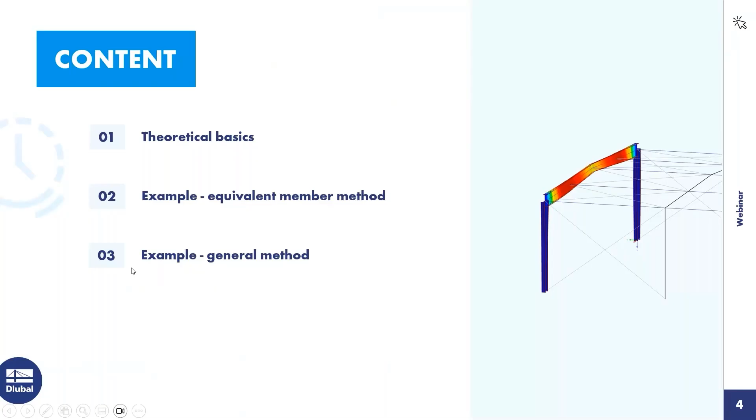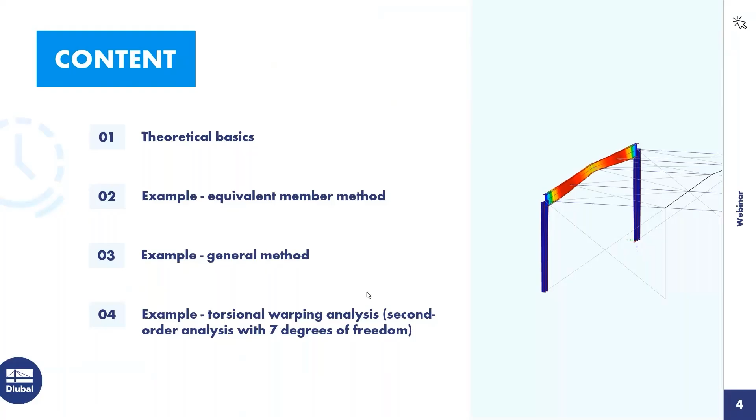For today's agenda, the first point is theoretical basics. It's only a small chapter in this webinar, as it should be more of a practical webinar. I've got only 3 slides. Then I start with the first example using the equivalent member method, then the general method, and in the third example, the torsional warping analysis, the second order analysis with 7 degrees of freedom.

Let's start with this overview table where the stability analysis methods are compared. You can see the limits of the different methods in the table. We'll go through this table line by line.

First line: equivalent member design according to 6.3.1 of Eurocode 3. This is for uniform members in compression. I sections, hollow sections, and other sections are valid, but only for compression. Then the different designs - flexural buckling, torsional buckling, and lateral torsional buckling - are done. Examples for these methods would be hinged columns or compression members.

Then the second line, equivalent member design according to 6.3.2, uniform members in bending about the principal axis, and lateral torsional buckling due to bending will be done. This method is for pure bending beams.

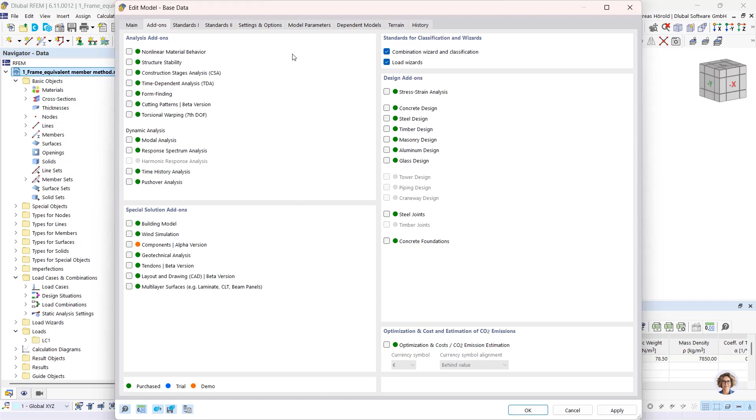Let's start in the program with this example. In the first step, I activate the steel design. I go to the top left to the base data, then I activate the add-on steel design. Now we would like to design according to Eurocode 3 and the European Annex.

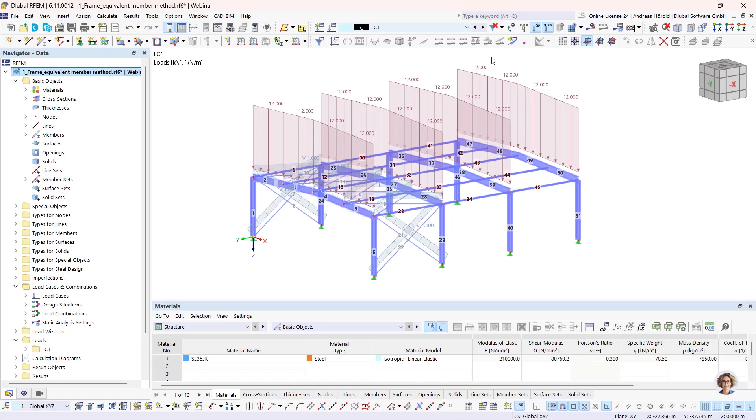That's the example. You can see the construction is different in the longitudinal direction with bracings, and in this direction with the frames. That's the loading - same loading for all frames, because we would like to apply a horizontal load later on this frame to compare the different methods. We only create one load case. The combinatorics doesn't matter today; the focus is on other things in this webinar.

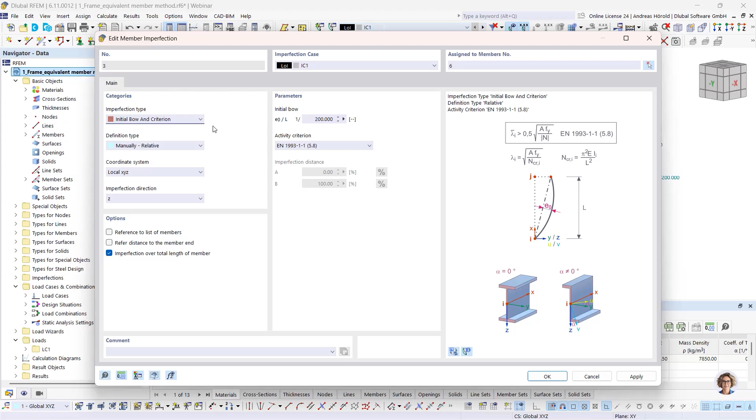So I'll show you the imperfections that are applied. First, this initial sway according to Eurocode 3, based on the height of the structure and so on - this value is calculated automatically for the initial sway. Then I also applied member imperfections with initial bow and a criterion. This will only be applied if this condition is fulfilled, which is not the case in our example, but I would like to show you how to apply such an initial bow and criterion.

Then we go to the load cases and combinations.

Okay, so I created previously a member set for this horizontal beam, and I activated design properties.

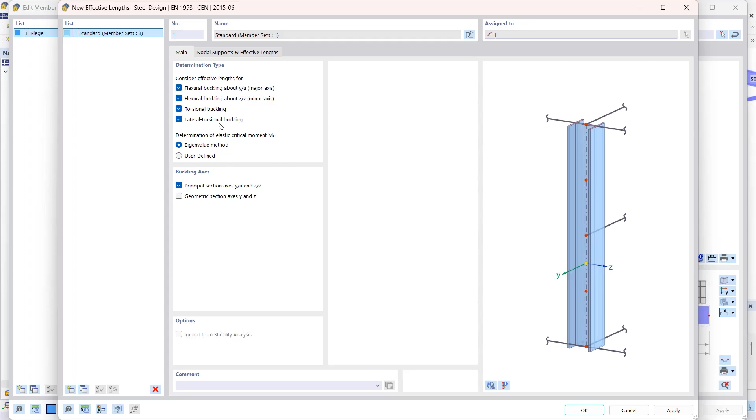Now we would like to consider flexural buckling in both axes, then torsional buckling and lateral torsional buckling. So then we've got intermediate nodes. With this button, I can import the intermediate nodes.

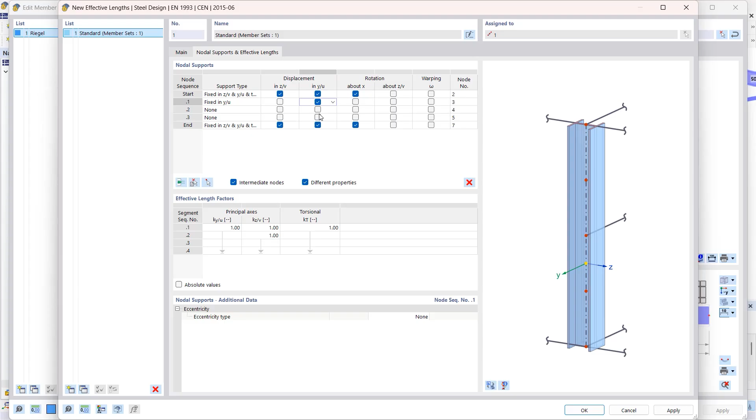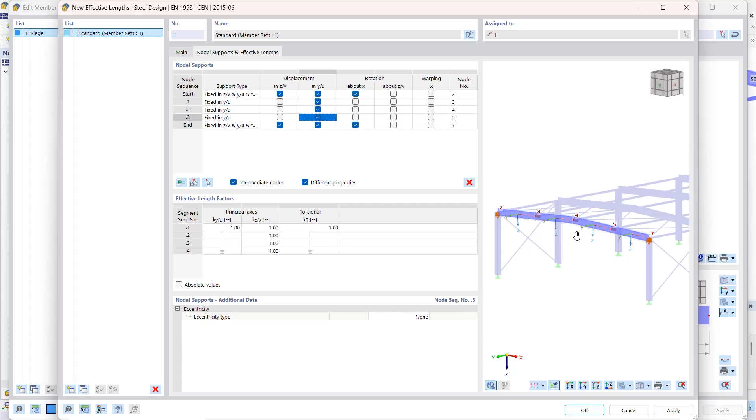Okay, so we would like to consider or check displacement in the Y direction. We can see it better here when I click this button. Fork support and horizontal support in the intermediate nodes. Okay, that's all.

And now we turn to the ultimate configuration. Let's check this. I would like to perform the stability analysis. And we can uncheck this box, since the equivalent member method and the general method already account for gamma 1 in the formulas.

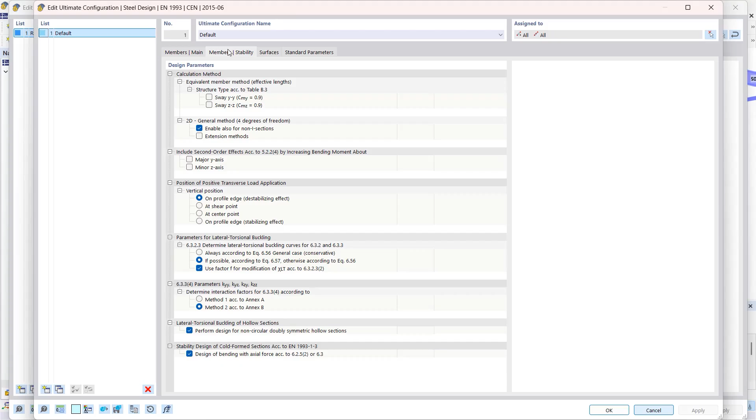Okay, and we leave all the default parameters now from the standard. Then the columns. I select both columns and double click on it. Both columns are selected, then I check the design properties.

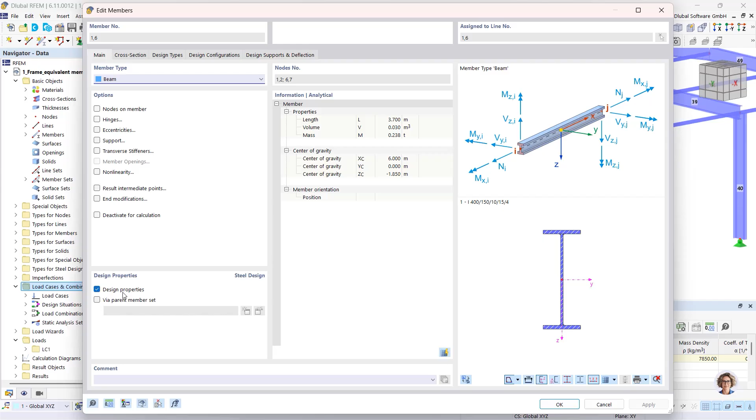Then design types, and we have to create new effective lengths. All the stability design will be done. And this is also okay.

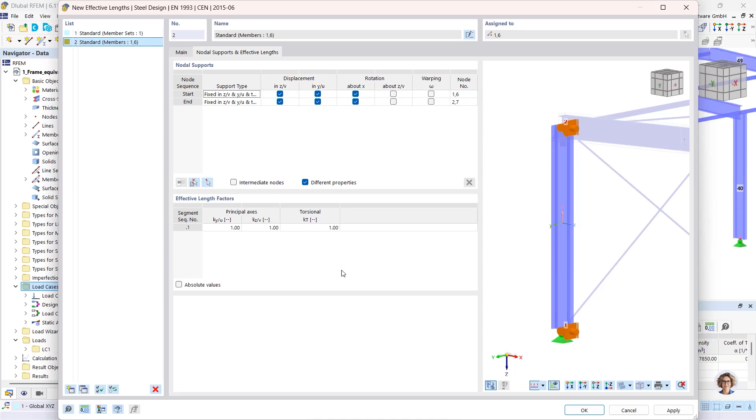I use this settings for the columns. Buckling length is equal to the member length. And we also applied imperfections, and we calculate according to second order theory. That's why this is valid.

And I can also display it here in the model if I defined all correctly. Types on the navigator display, types for steel design, member effective lengths. You can see all the supports and effective lengths here.

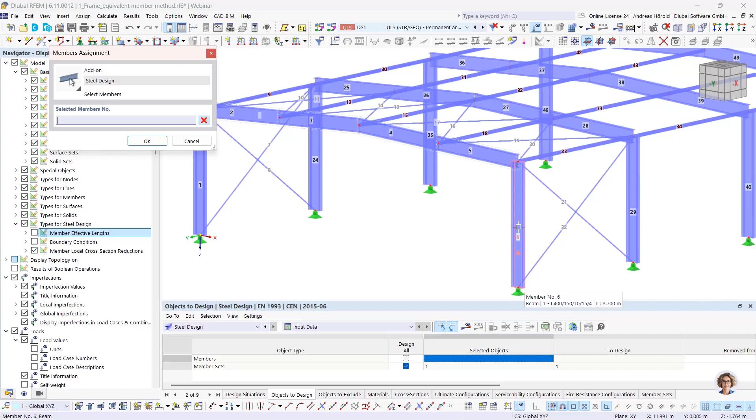Okay, then we turn to the steel design. Ultimate limit state design, objects to design. I would like to design the member set, the horizontal beam, and the two columns. Now we would like to design only the first frame in this webinar. Okay, then we can start the calculation.

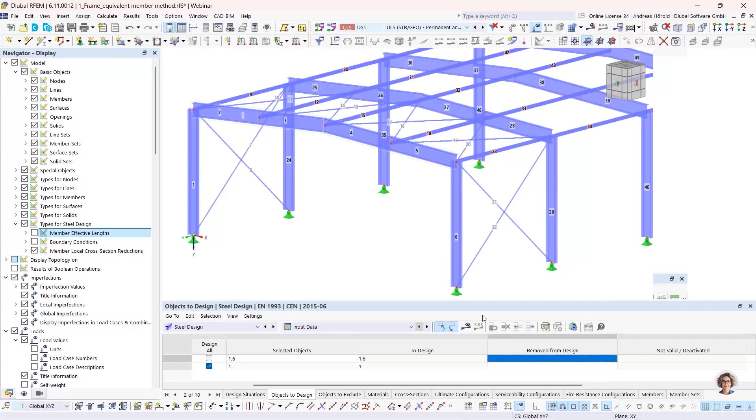Okay, the calculation is done. You can see the design checks. We are about 70% here and 55% for the columns.

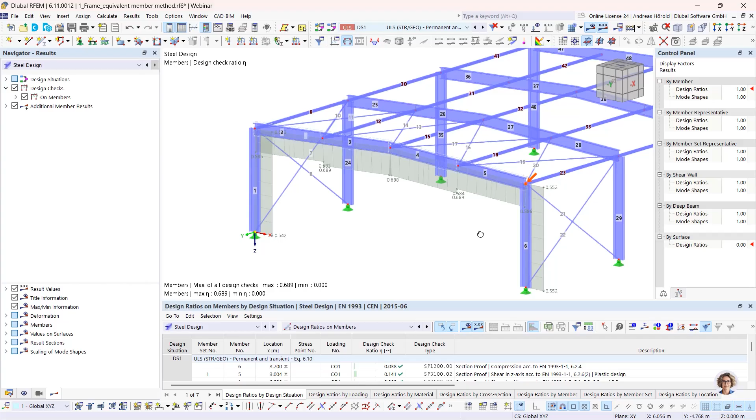So let's go to one design, for example, this one. You can see the equations from the standard and also the equations that were done here, right?

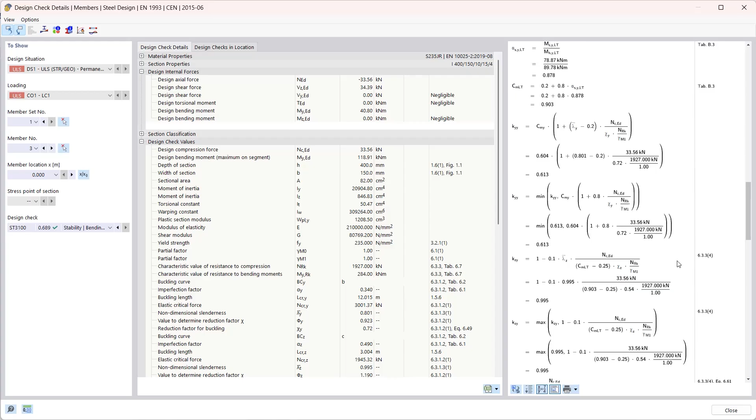And the design ratio, and you can see also the eigenform here for the horizontal beam when you click on this design check. Okay, that was the equivalent member design.

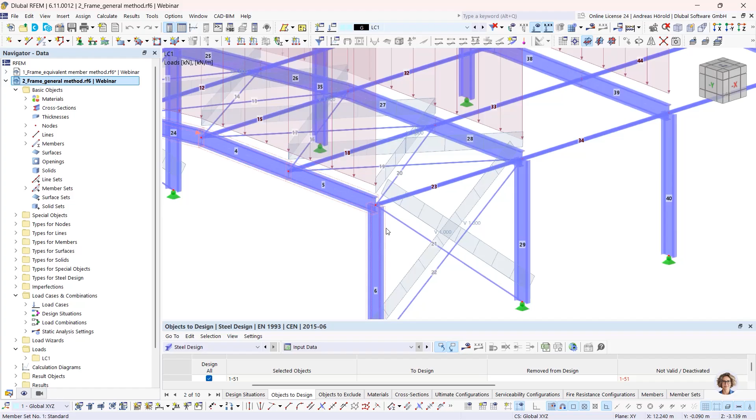Then we turn to the next model and the next design method, the general method. So that's the same structure, but in that case, I created a member set, this one. It contains the columns and also the horizontal beam.

Then design types. This time I have to create boundary conditions because I would like to use the general method for the stability design. So that's correct, no supports.

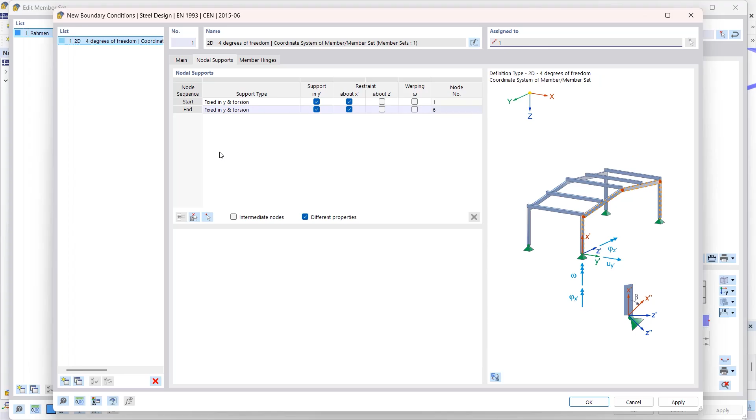I check or press this button again to import the intermediate nodes. Then I support, or we would like to support, the frame in this direction. You can see it better here when I click the button. So horizontal support, and we would like to apply a fork support on the column base.

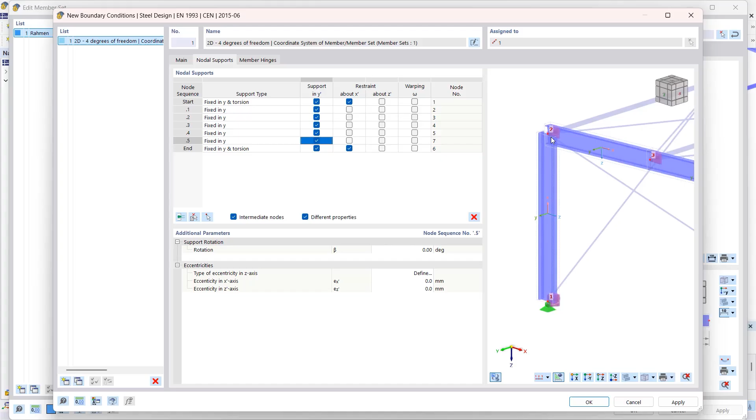And that's at the moment not correct, because the program uses this axis, and it would be correct for this node, but we have to rotate the support here. So I select both column bases with the control key and I rotate the support. And now we've got the fork support in the bottom of the columns. Okay, that's correct now.

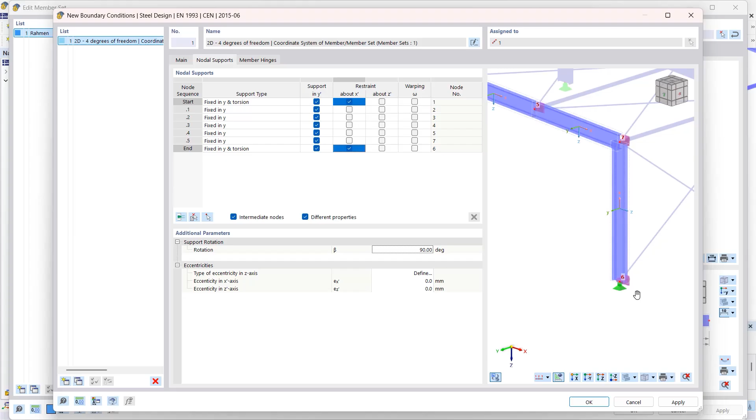We can leave the dialog. And you can see the complete frame is here, and you can see the support conditions.

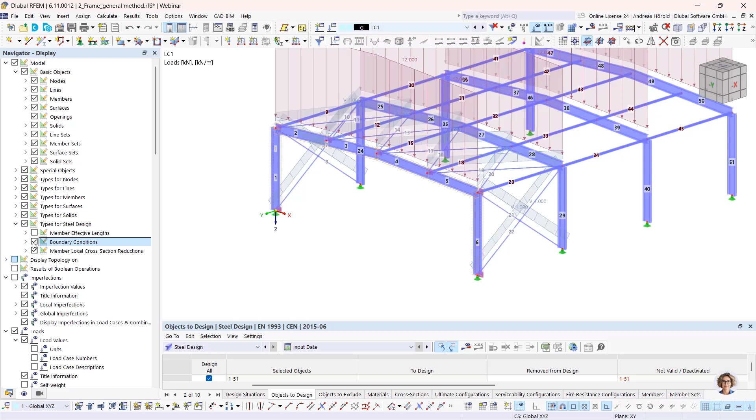Okay, we can again take a look at one here, member effective lengths, this time boundary conditions. You can see if all is applied correctly. Again, here, the global model.

So then objects to design, again only the member set. It includes this time also the columns. That's why we only need to check the member set here. So start calculation.

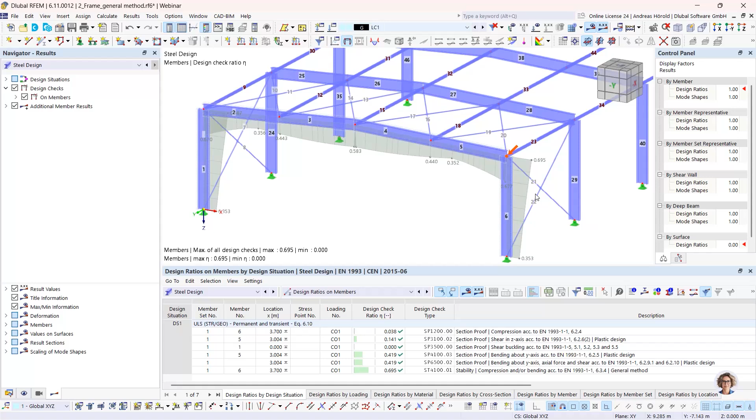It's done. Okay, and now we can see the design ratios, about 60% for the horizontal beam and about 70% for the columns.

Let's compare both methods. So then window horizontally.

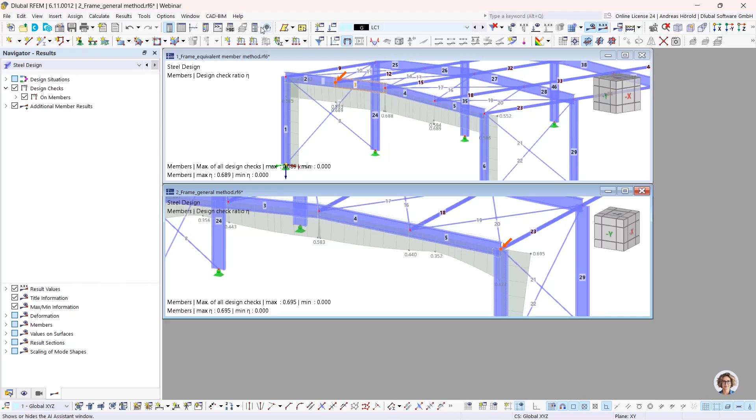Don't display the table. Window horizontally.

Take a look in the -y direction here and also -y direction here. You can see those are different methods with different conditions. The results are nearly the same, but not exactly the same.

Those are different methods. For the equivalent member method, we applied fork support here, and for this method, fork support on the bottom of the columns. It's not the reality in both methods, but near to the reality.

I think the result is nearly the same, but it's not necessary that you get exactly the same values or design ratios.

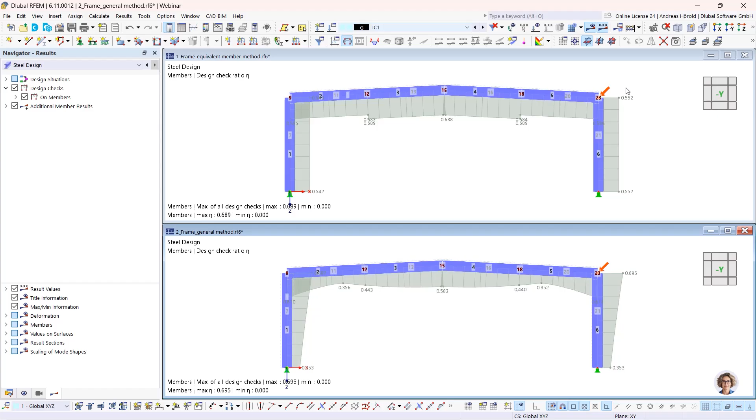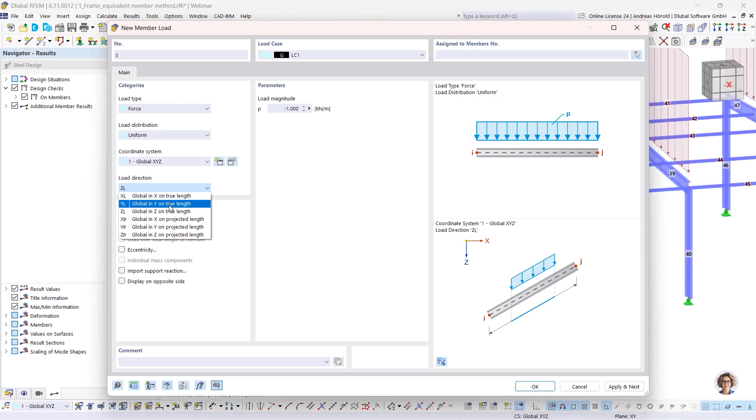So then I apply a horizontal load for both models. For the equivalent member method first. So load case 1, -1 in y direction. Only for the frame.

So we can start the calculation again. Steel design.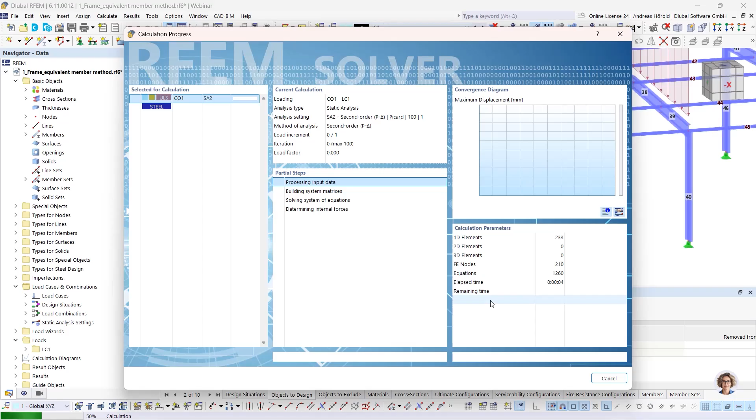We get nearly the same results. The design ratio is a little bit increased because of the low horizontal load.

But what I would like to show is what happened with the general method. We apply the same method, same load, -1 in y direction.

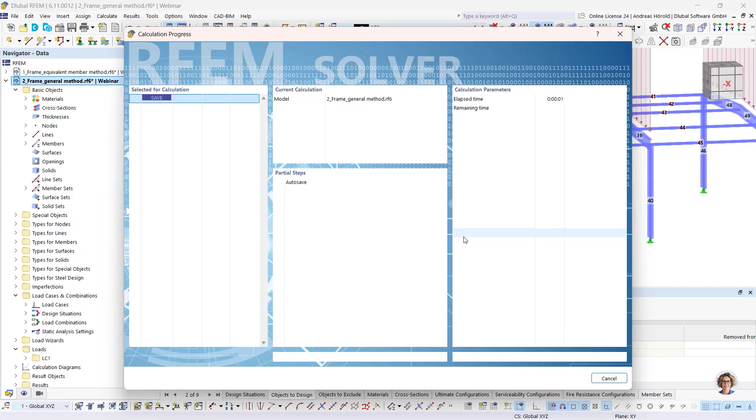And now we get the error message that the general method is not applicable.

Let's turn back to the PowerPoint slide. The reason is: for the general method, the moment about the weak axis is not possible. Yes, for the equivalent member method, but not for the general method. So that's the limit. We turn back to the program.

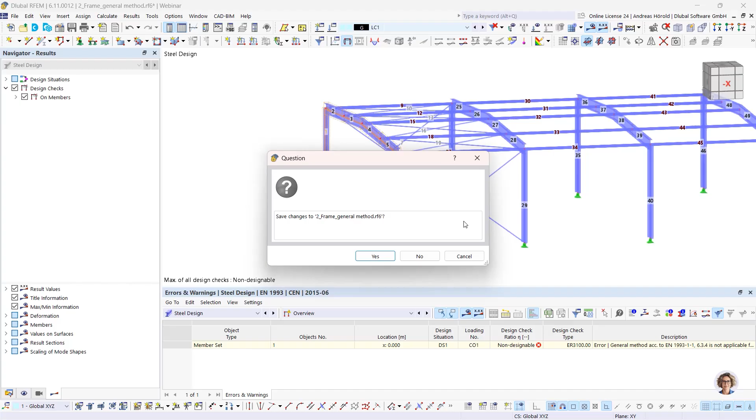I close both of them. And I group in another model, in the Dlubal Center. That's on the other screen. Just wait for a moment.

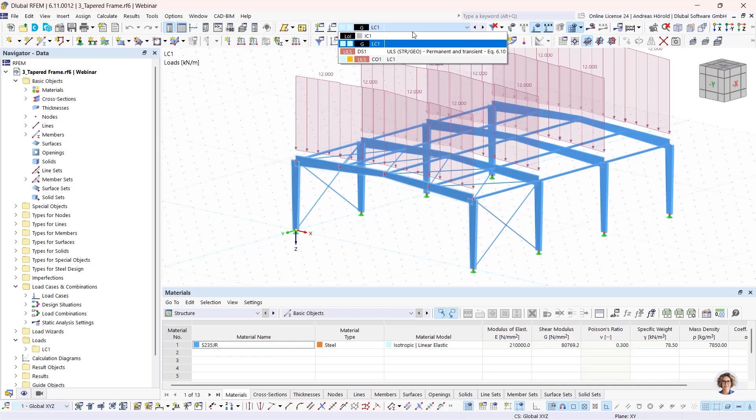So now a similar model, but now with tapered frames. All the loads and all the imperfections are the same as for the previous models.

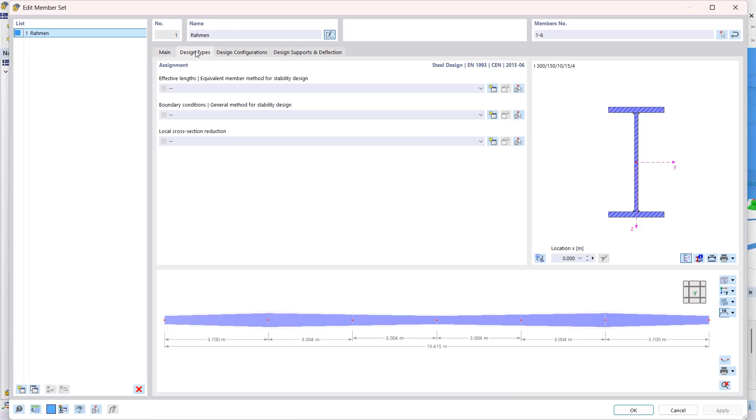And now we would like to use the general method again. That's why I open, or I select, the member set for the complete frame with a double click. Design properties, design type, and we need to set the same conditions. I go quickly through it.

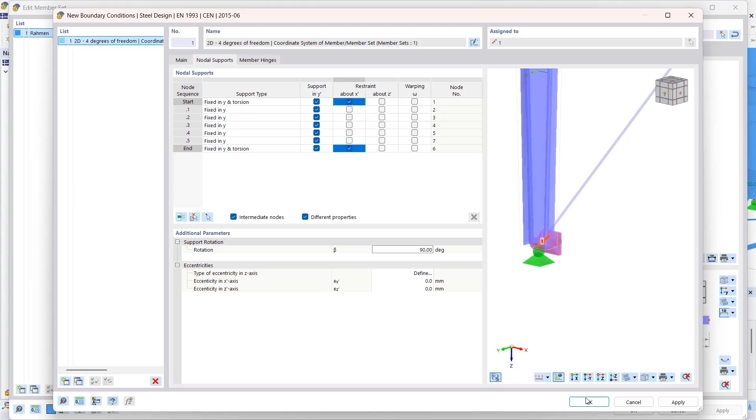I have to rotate the supports on column basis again, 90 degrees.

So now we can run this steel design. Sorry, I have to cancel it. We only want to design the member set.

We got design ratios about 60%.

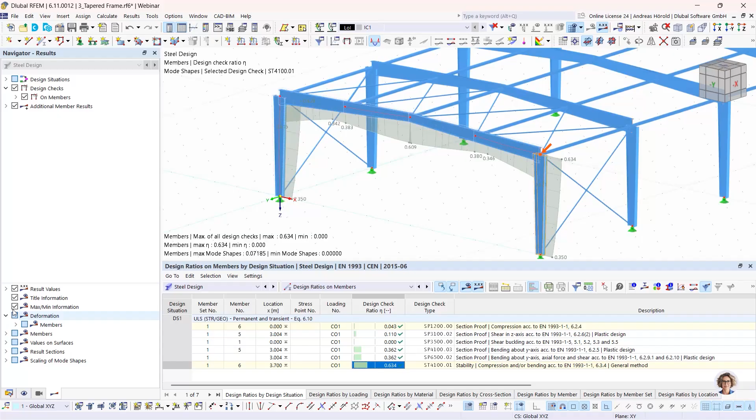Can also see the eigenform, but if it's displayed like this way, you have to go in the navigator: results, deformations, members, section colored. Yeah, and now you can see the eigenform.

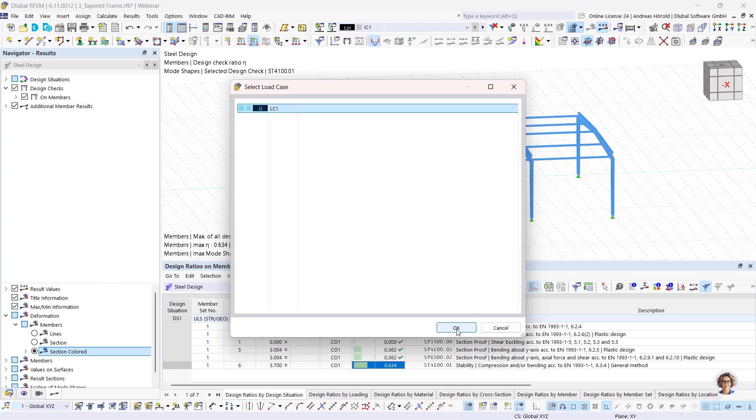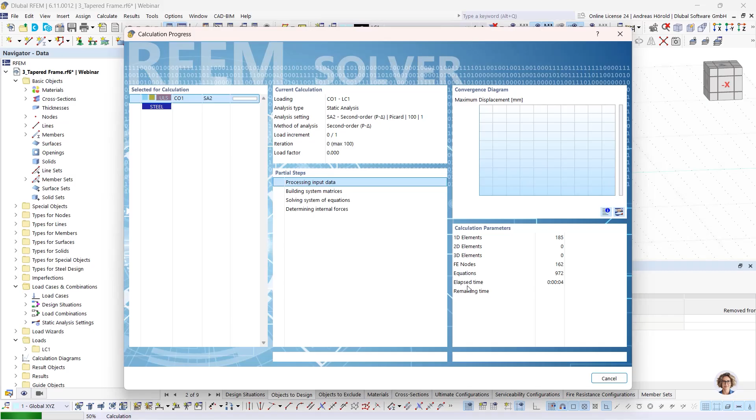So, okay, then we apply the horizontal load also for this model. And while I'm working... okay, the general method is not applicable again.

Let's turn back to our table. In the first step, we had a non-uniform member, that's okay. But now in the second step, we applied a horizontal load and we got a bending moment about the weak axis, and that's why this method is not valid.

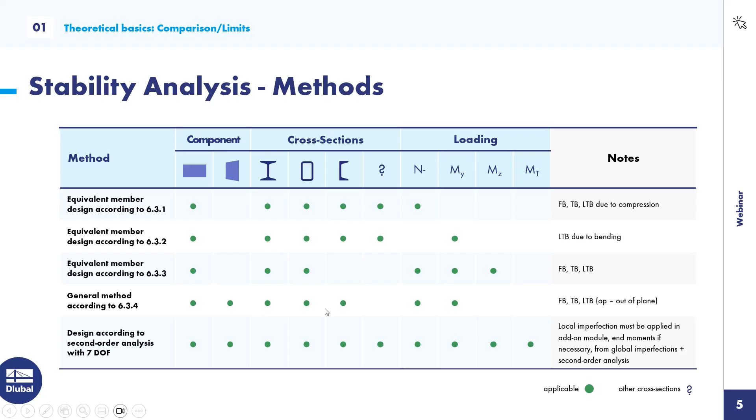So let's turn back to RFEM. File, save as. So I saved it as warping torsion analysis, because that's the next step: we would like to apply the warping torsion analysis.

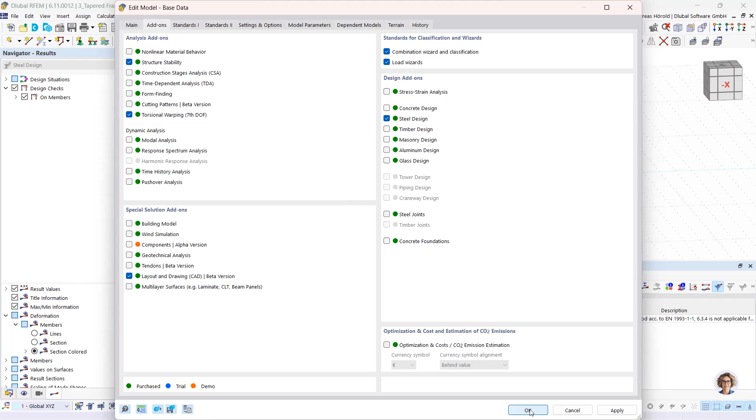So at first I activate in the base data, left above, the add-ons: structure stability and the torsional warping, with the consideration of the 7th degree of freedom in the global model.

So then I delete this set of members that contains the complete frame. We only create a set of members for the horizontal beam now. Right click, I selected all the members, then right click members, create member set.

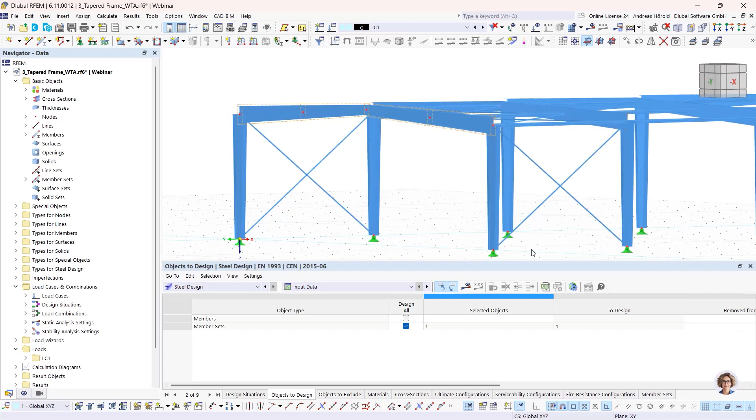So, and I need to activate the design properties. But we don't create any boundary conditions or effective lengths here. We would like to do the design with the application of the imperfections in the weak axis and so on, and use the second order analysis and the consideration of the 7th degree of freedom.

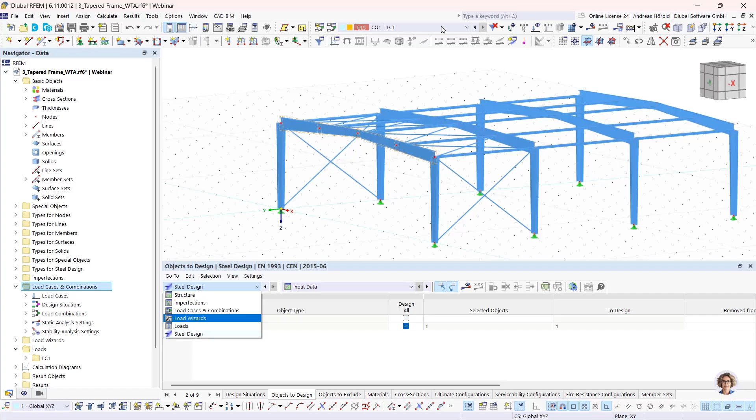We have to turn to the member set, and we have to check the discontinuous torsional warping. Okay, and run this calculation for the combination again.

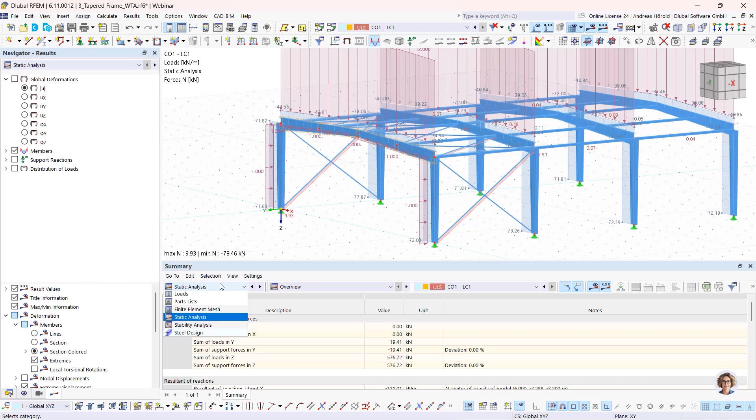You can see that this is the steel design, with static analysis and stability analysis. So then we check the stability analysis here.

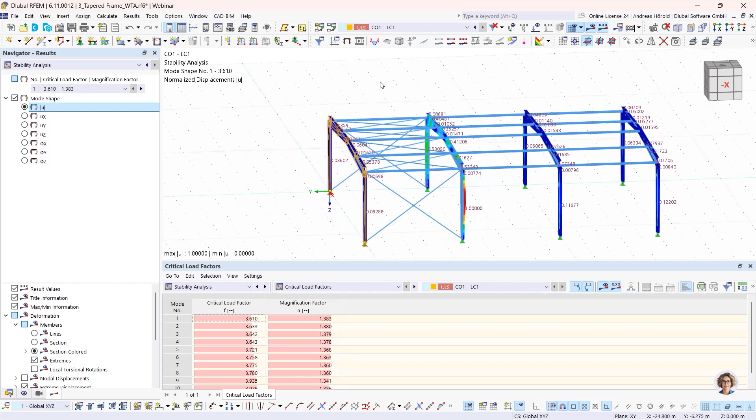Now you can see the different eigen shapes. We would like to design only this frame. The eigen shapes are quite similar, so I select only this frame for a better overview. You can see it's quite the same eigen shape.

So then I turn to the panel so that I can see the panel. Increase the value a little bit. So let's take a look at different mode shapes. This one, then...

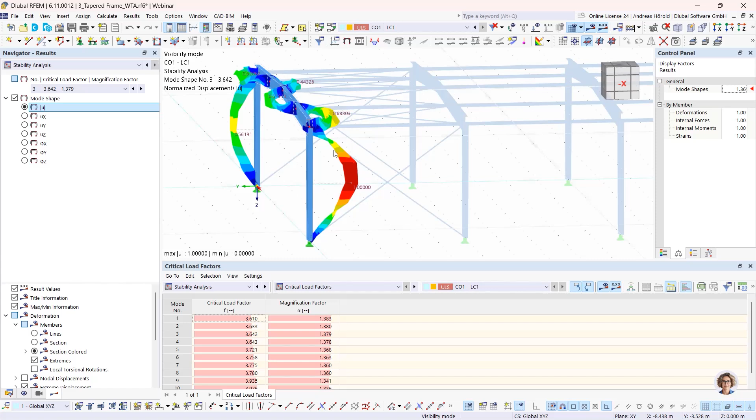The second one. Take a look at the columns and the horizontal beam, where different mode shapes are buckling in this direction, now in this direction and this direction, and you can see the shape for the horizontal beam.

We would like to apply imperfections in the horizontal direction. That's why I take a look at the mode shapes uy. So the conclusion is we have to apply different imperfections.

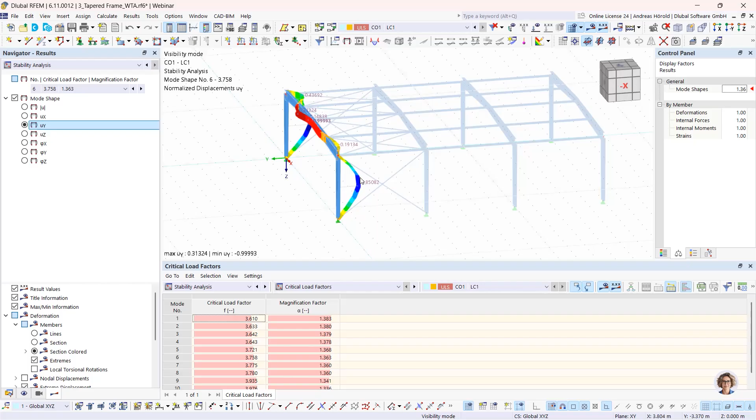In the first step, I deactivate the stability design. So now we create a new imperfection case. Imperfection case 1. Okay, case 1, and I apply the imperfection.

So, initial bow, then manually relative, in the global axis system, y direction. What I have to enter here, I will show on the next table. Pre-camber, those are the limits from the standard.

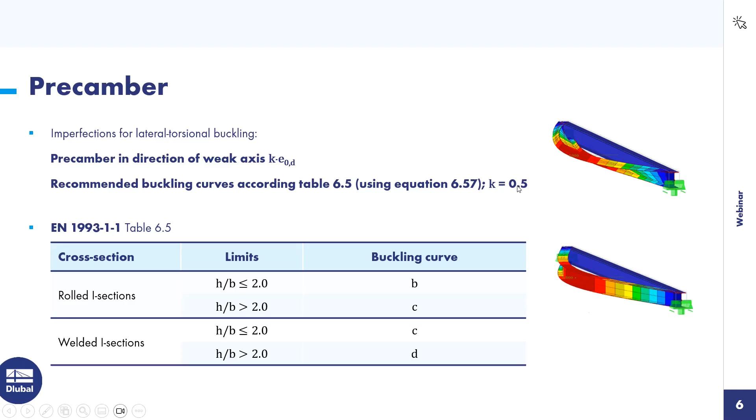The k value is 0.5. We have got welded sections, H to B larger than 2, that's why we have got buckling curve D. In this table, for buckling curve D and the elastic design, it's 1 divided by 150. The elastic design will be done in the warping torsion analysis, that's why we need this value, but the k value is 0.5, so we apply 1 divided by 300.

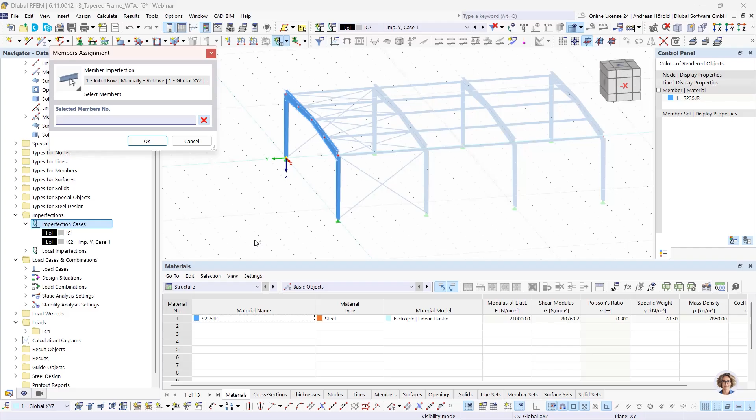So let's turn back to the program. 300. And apply this on all the members here.

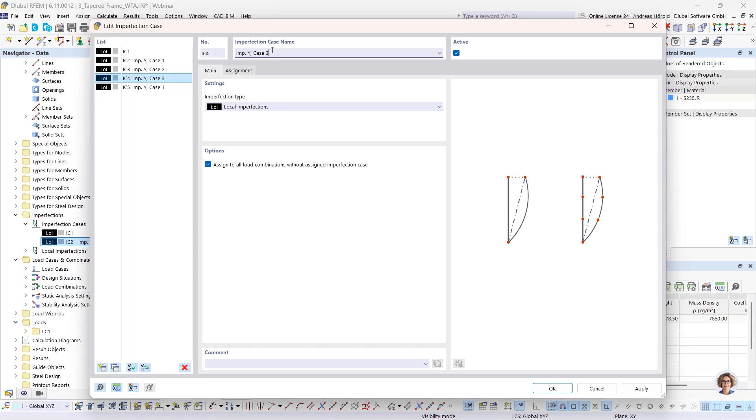So now I copy the imperfection case 3 times with this button here. And I rename one: it's case 2, case 3, and case 4.

Now I change the different directions. So for case 2, I change this direction. With the control key, I can select more than one. So this one, double click, and I change the direction to the reverse y direction. Now for case 3: this one, this one, and this one.

Double click, and now the same workflow. No, that was not correct. This one should remain in this direction.

Case 3, then case 4. I change only the directions of the imperfections on the columns. Now, if you are unsure, you can create more imperfection cases. Let's go through all the cases. We would like to do the design only for these cases, for these imperfections.

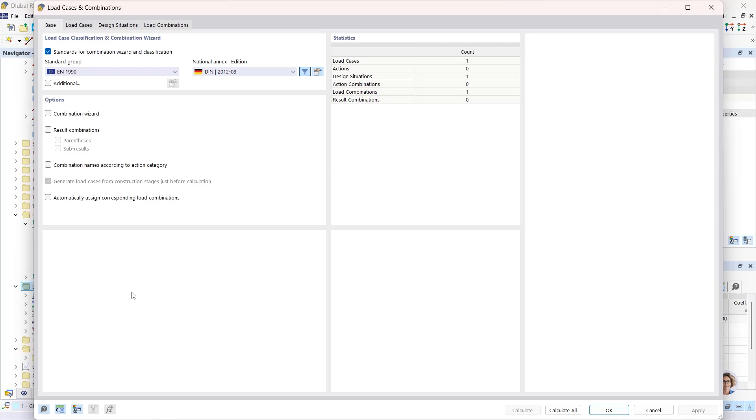So in the next step, I open the load cases and combinations dialog with a right click, load combinations. I copy that load combination 4 times with the button at the bottom.

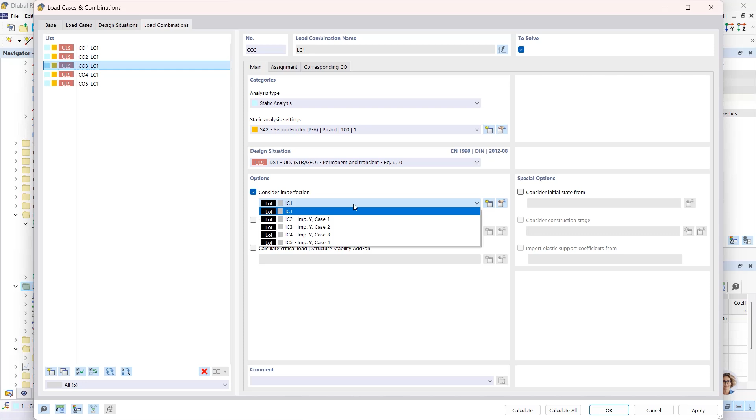So then I apply imperfection case 1 here, case 2 for this one, case 3 for this one, and case 4. So now this is done.

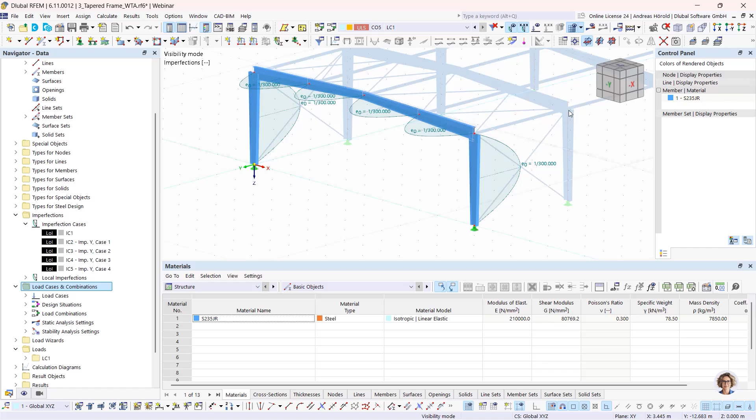Now we can go through the different load combinations with the imperfections, and also show the loads.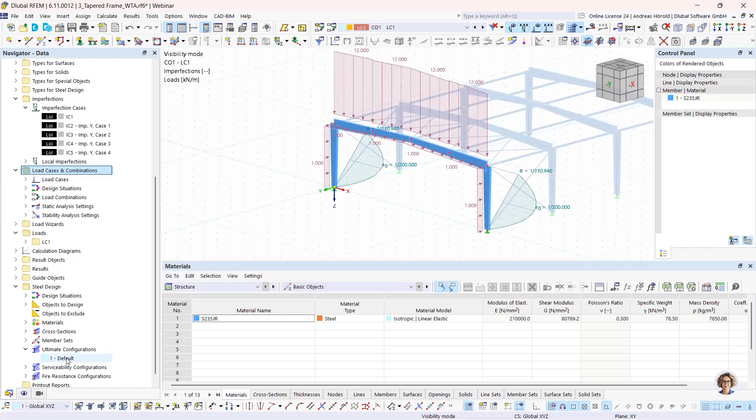Now we would like to do the steel design. I go to steel design and the ultimate configuration. We can open this also when we select the members and the member set, but we would like to do it for all, that's why I select it here. Click on it. We don't check this one, perform stability design — we want to perform the stability design using the cross-sectional design.

So yes, and we check this one: stability analysis with second order internal forces.

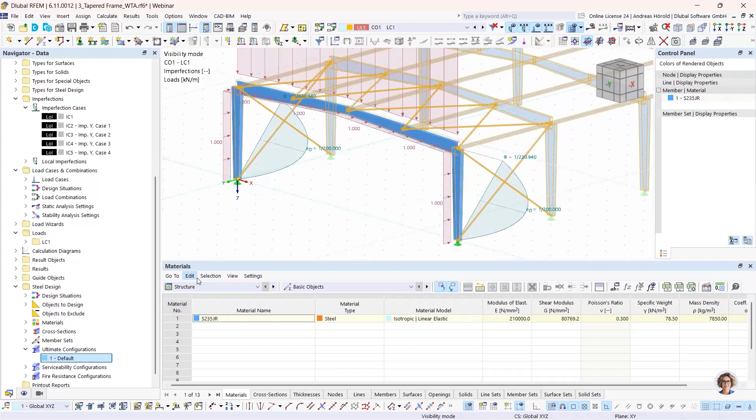Then steel design for the member set and also for the 2 columns. Okay, and I run the design. All designs are fulfilled.

Now we can see we have the tapered beam, we have loads in all directions. For this method, all is possible, but it's a little bit more difficult to apply the imperfections. That is what you can see.

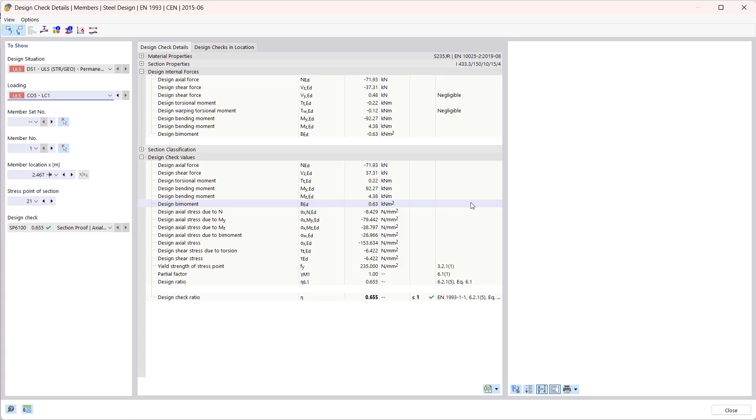So this is the formula from the standard. It's also the highest design check ratio, and that's the formula. Now you can see it's an elastic design, and we've got also the possibility to do a plastic design.

So at first I save the file 2 times. File, save as.

Okay, torsion analysis finished. Later you can download the models from our website.

Save, and file save as. Finish. Testing. Save.

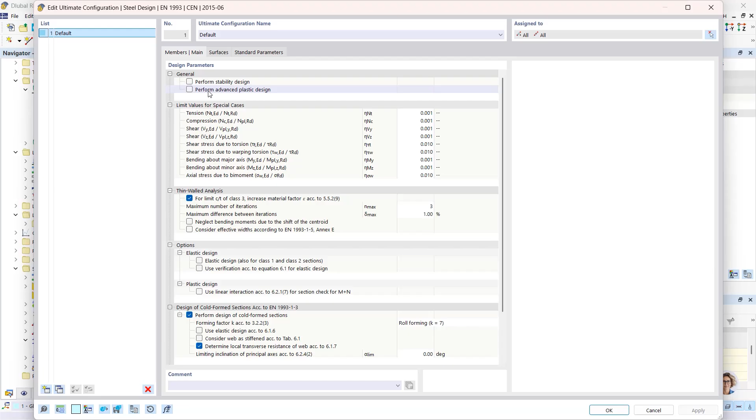Let's turn back to the ultimate configuration default. Right click on it. So, we have got the possibility to perform an advanced plastic design. Let's check that, and you can see this new dialog here.

If plastic design is required, the partial internal force method can be used. But please combine it only with warping torsion analysis, as no stability design is performed. The stability is verified for the entire system using second order theory, warping torsion analysis, and imperfections, what we applied previously.

So then, the plastic design according to Eurocode 3 is only valid for cross-section classes 1 and 2, and the partial internal forces method with redistribution is only for 2 and 3 sheet cross-sections.

For this method, there's also a knowledge base article available. I would like to show that on our website. Under support, you can find the knowledge base. And if you, for example, search for plastic, you can find this article: Plastic cross-section checks using partial internal forces method. You can read this article if you want.

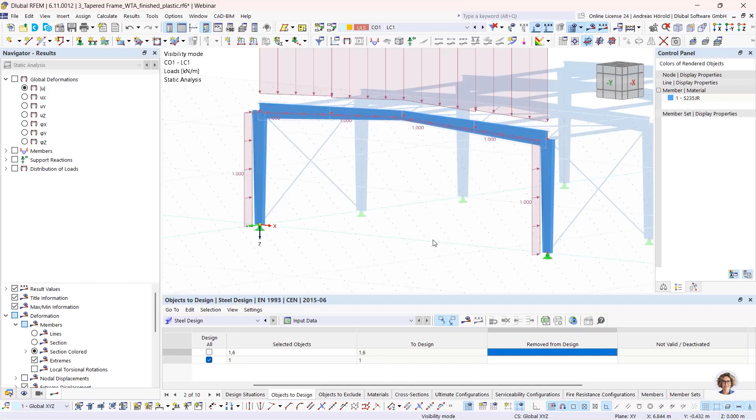So we are back in RFEM. Okay, so now we would like to do a plastic design. That's why we need to increase the imperfections.

Let's turn back to the PowerPoint slides. You can see that's for the elastic design. And for the plastic design, 1 divided by 100 multiplied with p-value 0.5 means 1 divided by 200 is what we need to apply.

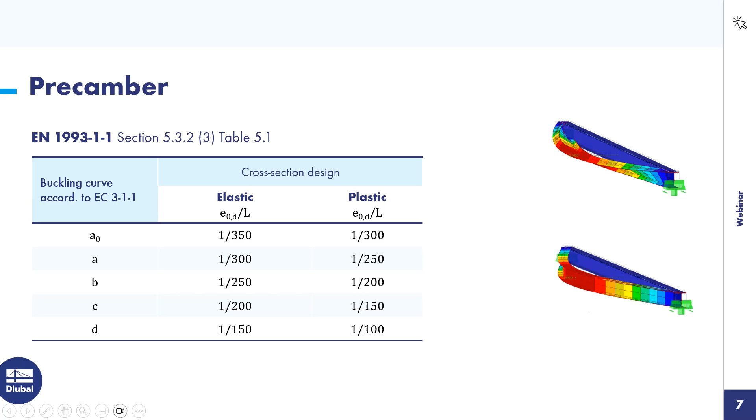So let's select all. I double click on the imperfections, 200, for all cases. Now the direction remains. Oh, I didn't select this one. That was my fault, sorry. Was it correct for the first case? Yes, it's also correct. So then case 200.

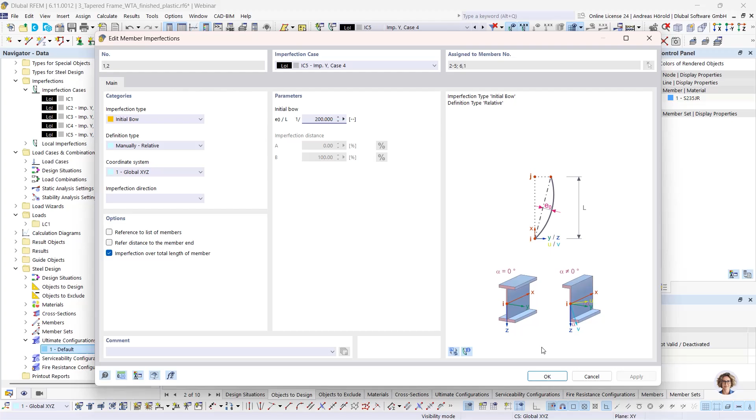So in the last case, okay, so let's run the calculation. Okay, and you can see, we are quite small design check ratios.

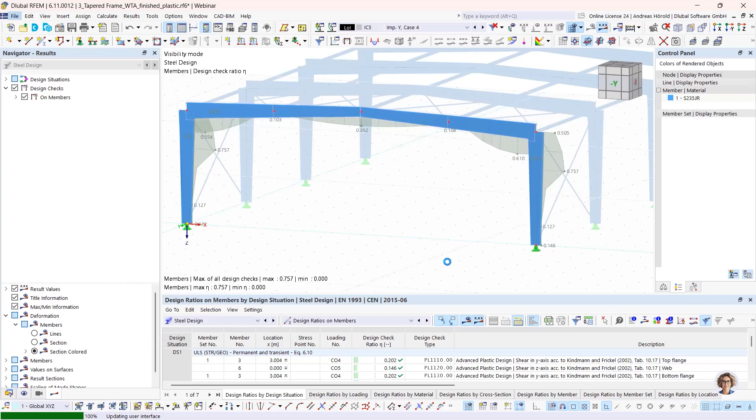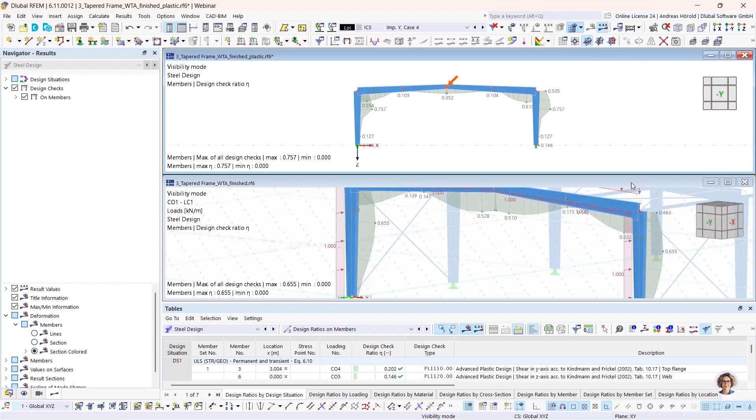Let's compare it. We open the other file again, with the warping torsion analysis. Okay, window tile horizontally. Let's see. I hope you can see all without notes.

So you can see for the horizontal beam with the plastic design, we have smaller design check ratios. But for the column on this node here, or on this place, you have got a higher design ratio.

Now why? The reason is that there is a cross-section class 3 here, and the plastic design can't be done. But we have got higher imperfections, and that's why we get a higher design ratio on this place here.

But you can see lower design check ratios here. Let's check this value. So that's the design check. I double click on it.

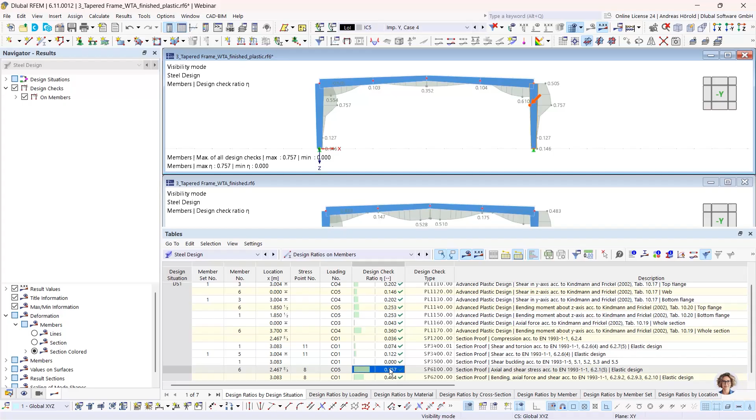So section classification, and you can see cross-section class 3. And that's why the partial internal force method can't be applied. Only elastic design is valid.

Those are the 3 models and the 3 methods that I compared. I hope you got a good overview. In my opinion, the equivalent member method and the general method are simpler to apply, but you have different limits and restrictions.

The design according to second order analysis with seven degrees of freedom allows all components, all cross sections, all loadings, but the application of the imperfections is a little bit more complex, I think.